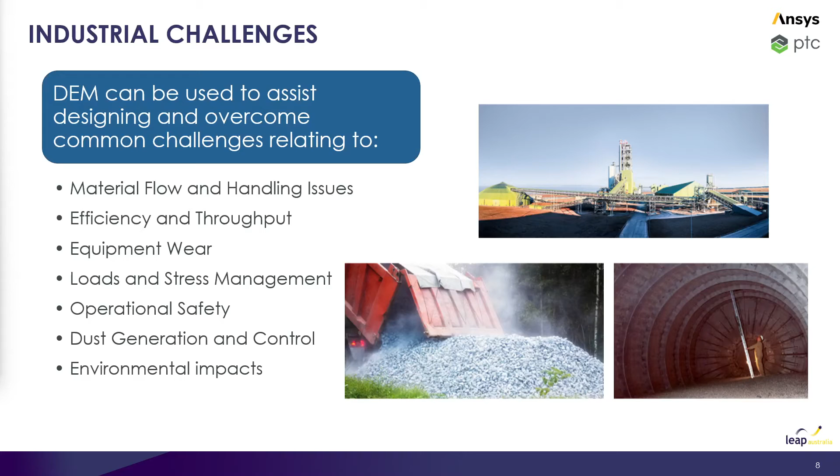So, what kind of applications can we study or systems can we model? Any type of mechanical or material conveying applications. So, as I mentioned before, because we are resolving individual particle collisions, the models within Rocky support high fidelity capture of local and global behaviors of bulk materials.

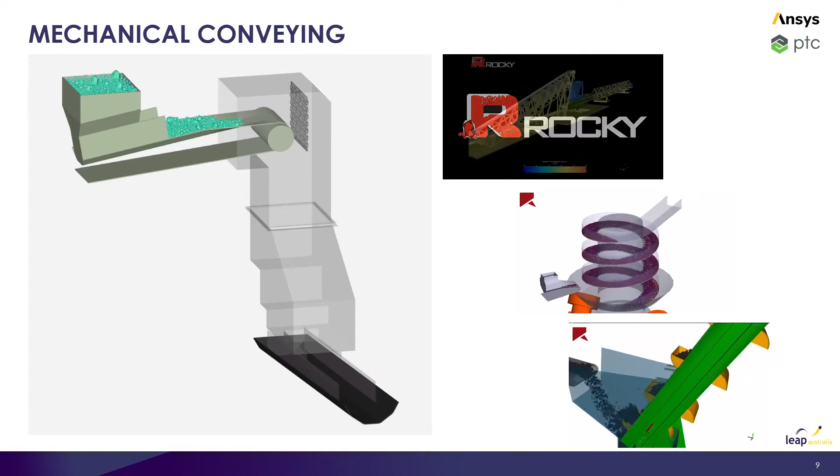So, we can consider how does the aspect ratio or blockiness of the constituent materials affect the way that the bulk will naturally pack? What is the bulk density? A concept that's absolutely critical if we want to satisfy mass flow rate requirements, for example. We'll also need to handle the equivalent volume flow rate through the system.

Also, as part of this, various different adhesion models support users by allowing us to consider both wet and dry materials. And there's also a strong control over the movement of the geometries or boundaries in the system. And so we can have geometries physically or explicitly moving within the domain, as you can see on screen with the vibratory conveyor, for example.

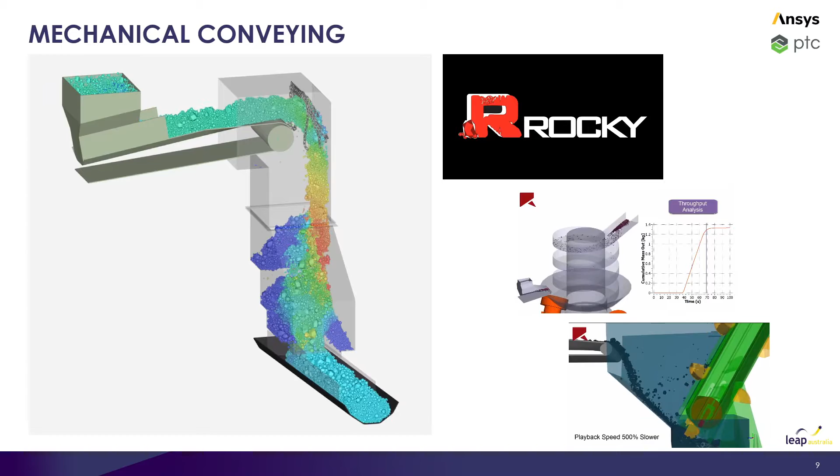Or we can use an alternative solution where the boundary will remain fixed, but any objects which interact with the boundary will still see the same relative motion. And the motions that we actually can prescribe are quite extensive, ranging from user-defined translational and rotational velocities, periodic movements or oscillations, to a full 6 degree of freedom free body motion.

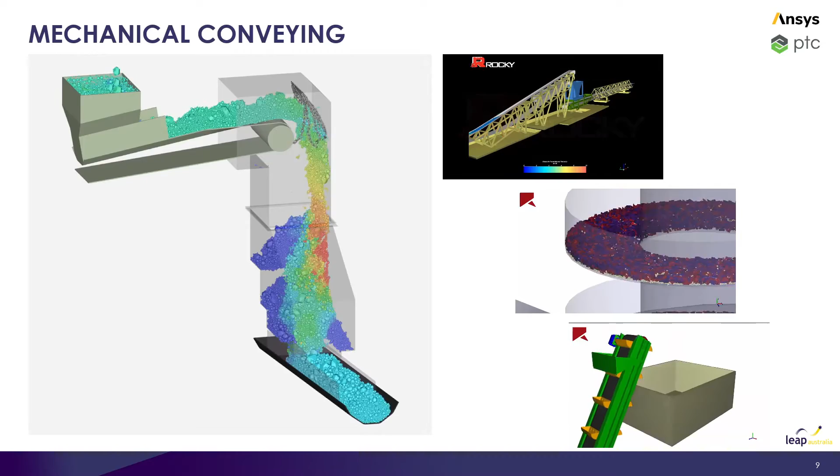Now, based on this, we can extract a multitude of data from the macroscopic behavior of the bulk. How does it flow through the system? Does flow happen in the first case, for the case of a poor flowing sticky material, for example? We can look at particle velocities and path lines. Are flow rates satisfied? And what's the power required to drive the prescribed motion in the system?

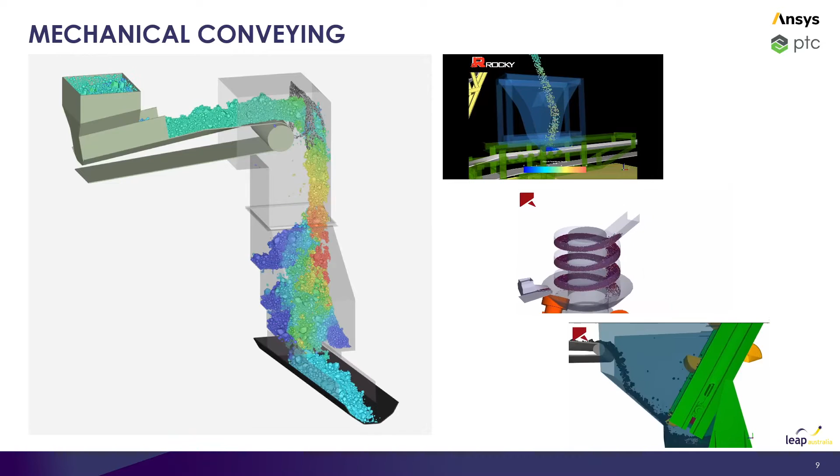Any sort of feeding, screening, or sorting applications can also easily be handled within Ansys Rocky. Now, it's critical to understand here that these types of applications operate on the particle scale. So here, the particle size distributions and their shapes play a critical role in the design of these systems and how they operate, how any given bulk material will behave also through that process.

So for us as the modelers, it's vital for those important characteristics of the system to be able to be represented. We need to accurately model the PSD and non-sphericity of the particle shape. So for solution quantities, if we look at the particle or flow perspective again, we can hit all the same points as we did in the last slide. But as I alluded to earlier on, we can also look at things more locally.

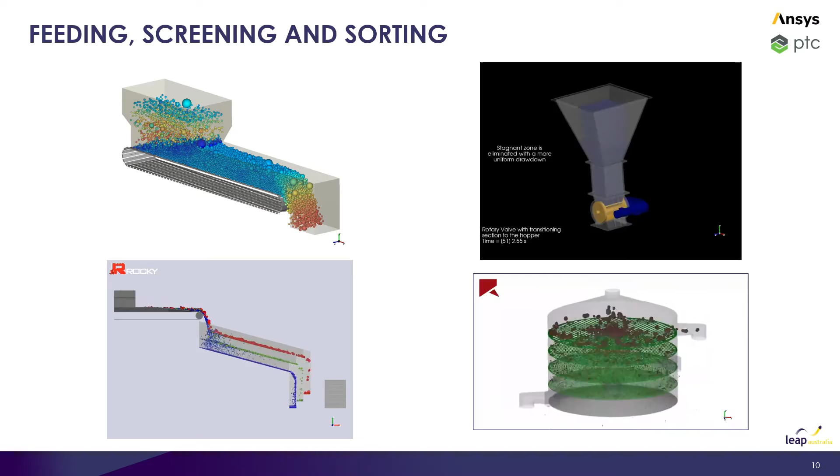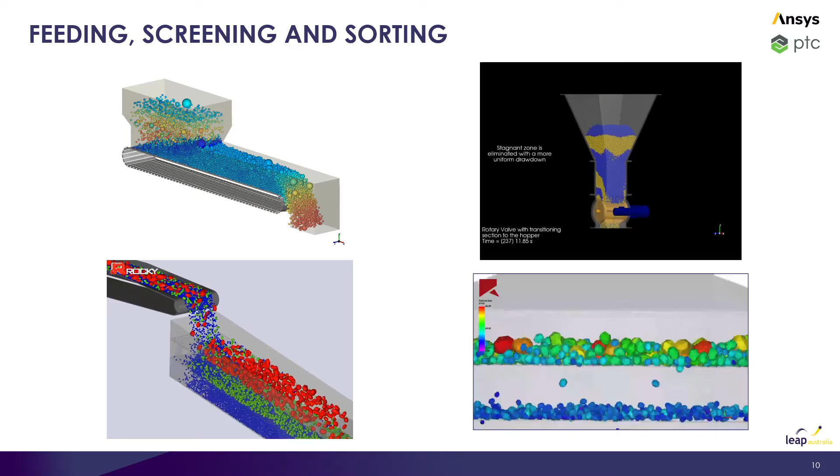So take the video in the top right, for example, looking at flow through a feeder with a rotary valve. We can identify various different flow structures, stagnant zones, mixing characteristics. And through any of these types of processes, we can identify the sorting or mixing efficiencies, particle residence times, or how a PSD will segregate or percolate through that process.

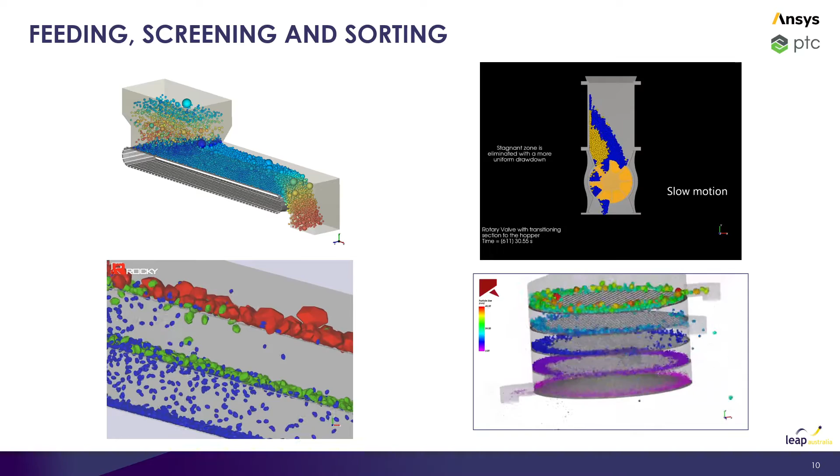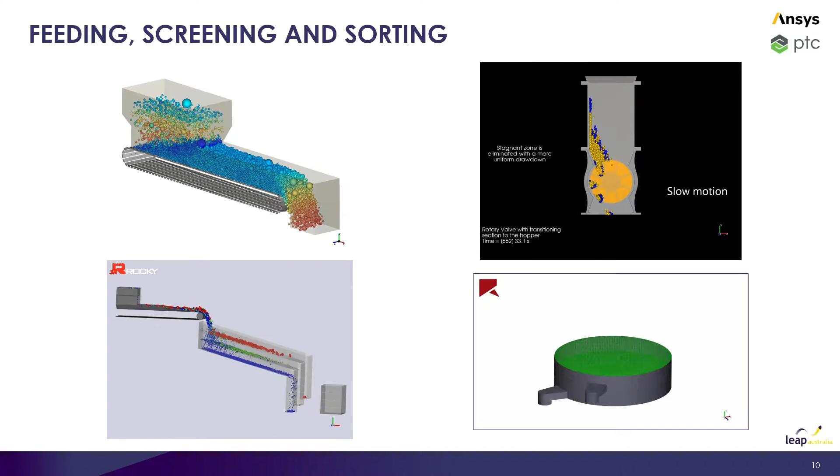If the surrounding structure is also of interest, we can extract wall loads or pressure distributions and even take that further and extract that bit of data for the purposes of coupling with a finite element solver. And again, for example, we can identify what is the power or torque required to drive motion.

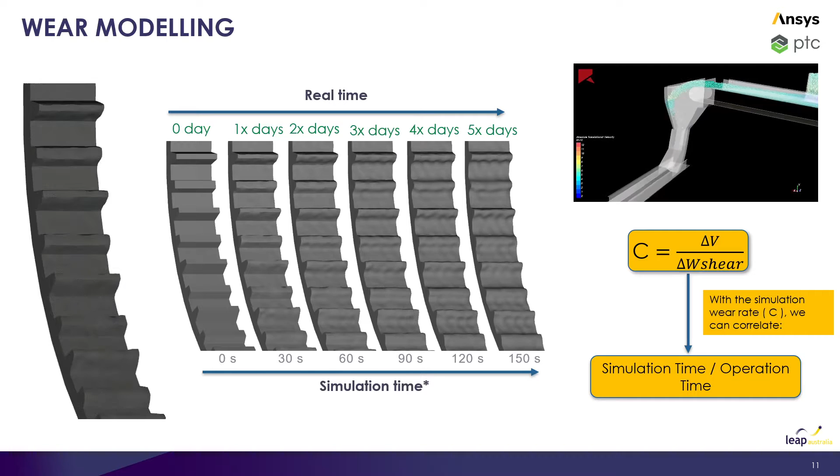Okay, so along with using DEM to study behaviors of bulk solids, we can also use the solver to investigate how the presence and movement of material will affect the structure around it. And one of the key aspects of this perspective is the concept of wear modeling, abrasive or impact wear modeling.

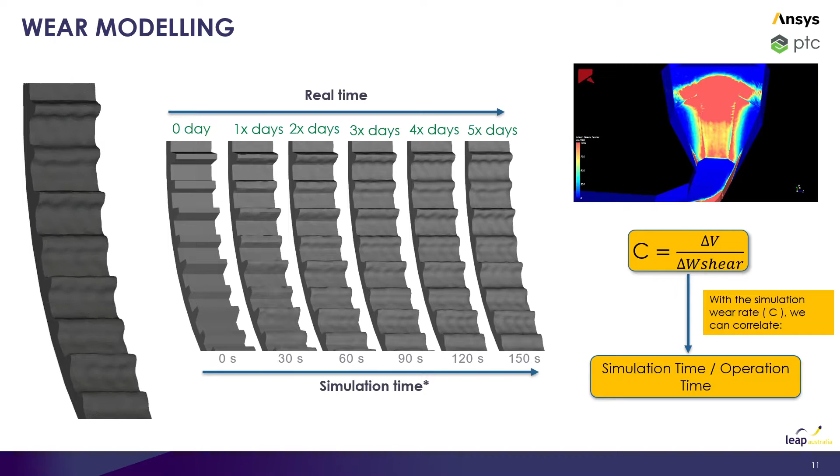Now, there are essentially two approaches that we can take to get an understanding of how geometries or walls or liners will wear away. The first is the least computationally intensive method, which is to consider the impact and shear energies for impact and abrasive wear predictions, which is what we saw in that top right video.

And we can use this to identify wear hotspots with the understanding that regions which will experience higher energy collisions will correspond to more volume lost by erosion. And so we can use these kinds of heat maps to identify those regions which are prone to wearing out.

And we can extrapolate data and say, okay, there was this much energy consumed by abrasive collisions after, say, 30 seconds of steady state operation. We can then expect after an hour it will be closer to X joules.

Now, the alternative method is to use the explicit geometry modification tool in Rocky, or the explicit wear model. This is an application of Archard's wear law, where the volume lost is correlated to the work done due to frictional forces. It's important to understand that when we are considering wear, the timescales that this phenomenon operates on are in the order of hours, days, or months of continuous operation.

And this is not something that we can feasibly model at a 1-to-1 ratio in our DEM models. We'll typically be running models with a simulation duration of maybe a few minutes tops. So what users can do is to effectively map a real life duration with an equivalent simulation duration, which is what we're seeing in this graphic here. And we can do this by modifying the simulation wear rate. This is a user-defined model parameter which controls the proportion of volume removed per unit of applied shear energy.

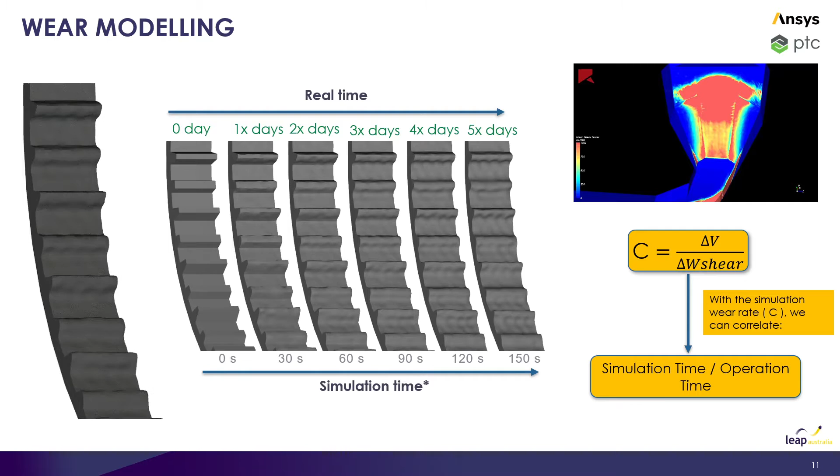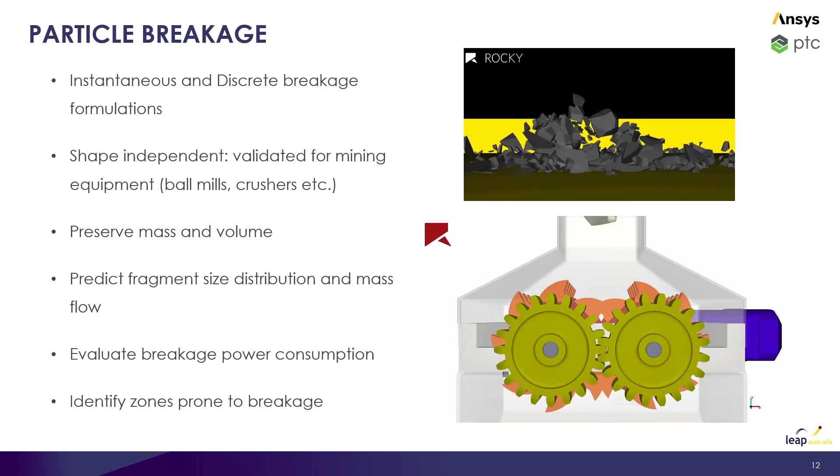One of the other useful capabilities for investigating these types of systems is, of course, particle breakage modeling. There are two formulations: the discrete formulation, which uses a particle with a fixed mesh. Basically, it's comprised of a certain amount of elements which can break apart depending on tensile or shear stress criteria. So the fragment size distribution is almost predefined based on the way that particle is meshed.

Now, the alternative is the instantaneous formulation, which is applicable to faceted particles like the polyhedron that you see on screen. This breaks apart into a number of fragments with varying size depending on the collision energy and the location of the collision relative to the particle.

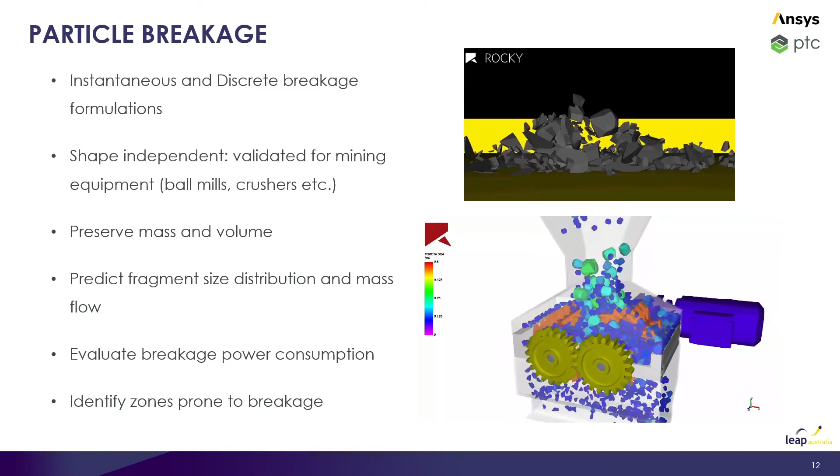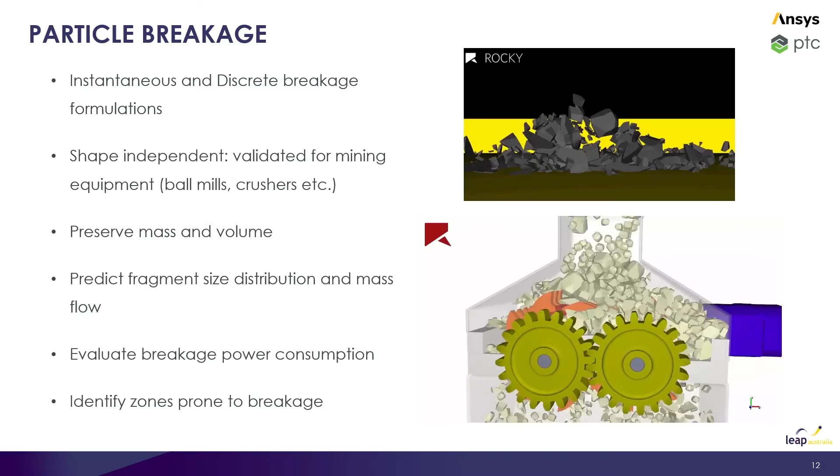These models have been validated, preserve both mass and volume, and we can use this to predict the progeny size distribution, the mass flow of material through crushing processes, for example, and of course identify any zones within the domain which are prone to breakage and understand how that material breakdown will affect flow characteristics.

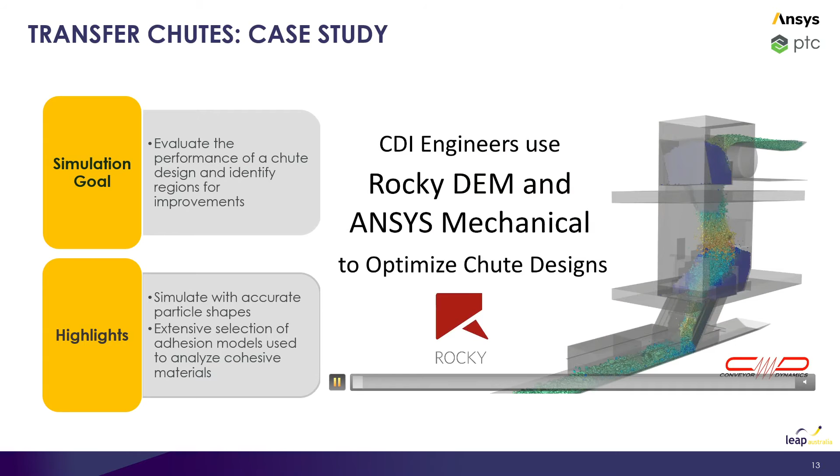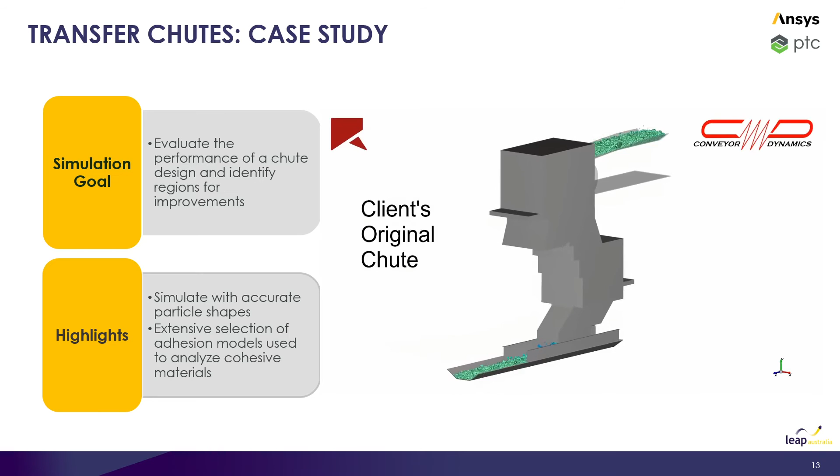So I've got a nice case study here. This was some work done by Conveyor Dynamics, who had an existing chute design. And what was happening was that at certain flow rates, the chute was plugging. And they were able to replicate this behavior in Rocky. So starting off by identifying some potential problems with the flow, but importantly, we can see that blockage effect has been captured.

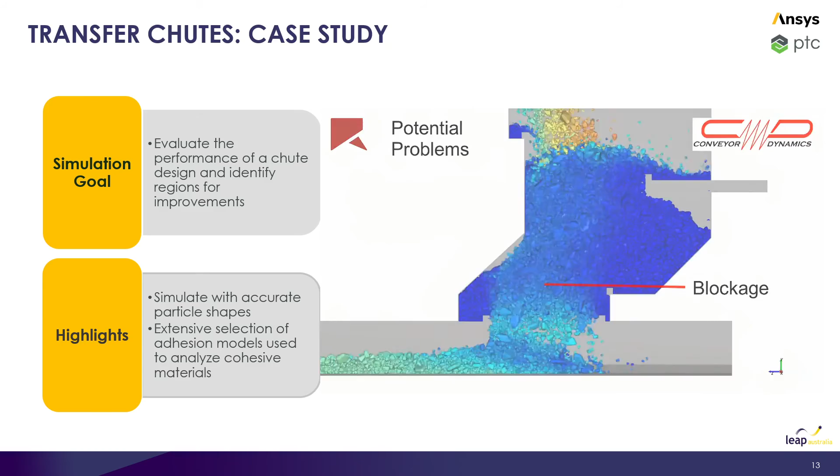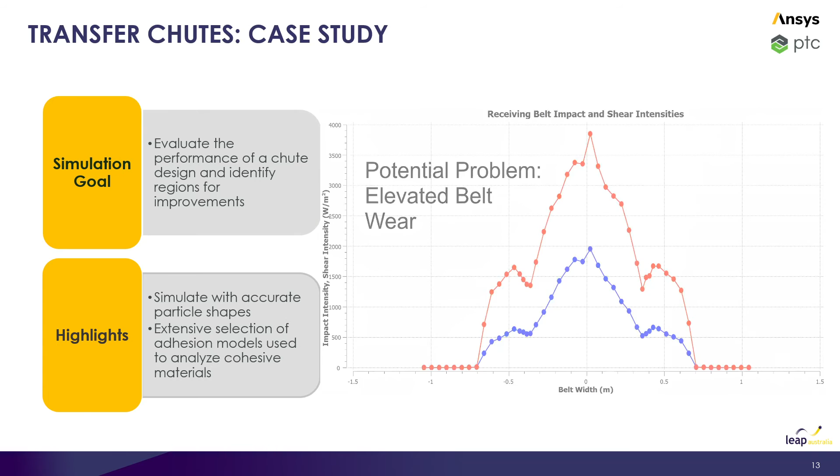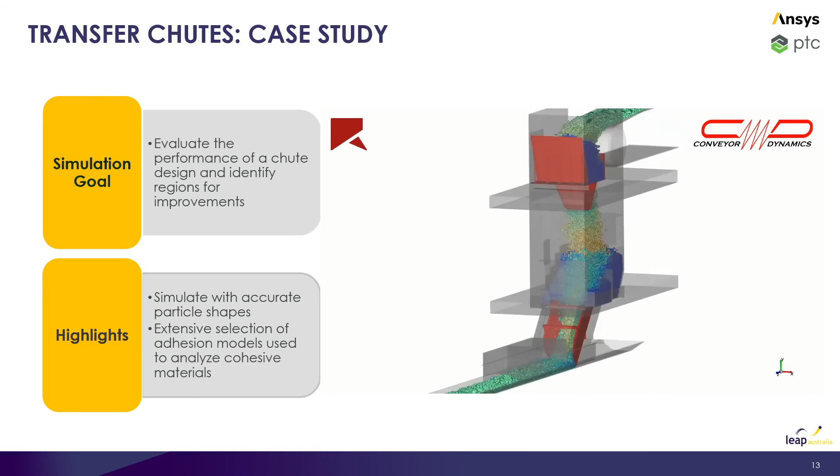So looking at belt wear from a shear and impact energy perspective, identifying the power required to drive the belt on the receiving conveyor. And now with this information that they had gathered with their first model, they were then able to propose a new and improved design to address those challenges that they had identified initially.